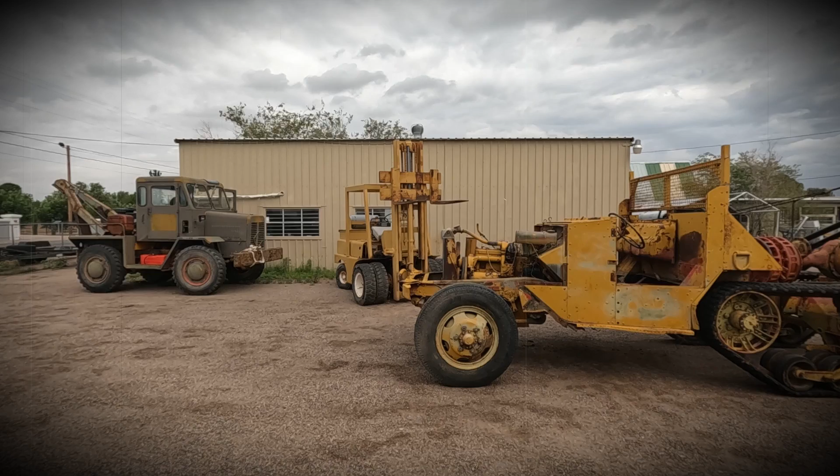Last time you saw me use this forklift, it lost forward and reverse right at the beginning of the job. I had to take the body off that half track just using this forklift and using something else to tow it around. Not the most convenient thing.

So in this video, I'm going to try to get this back driving again, going both forward and backwards, and still spending as little money as possible. Why don't you come along for the ride?

Now the transmission in this forklift is hydraulically operated. It's similar to an automatic transmission in a car. It's got a torque converter, and then it's got clutches to engage the different gears. In this case, it's a 2-speed transmission, high and low, and then forward and reverse. And those are independent, so you can have high and low, both backwards and forward.

So basically the principle is a pump pumps hydraulic fluid, that closes the clutches and holds them locked down, and that engages your wheels. And the torque converter sloshes fluid around like a big fan and squishes you forward. So how hard can it be?

Now what I have here is a diagram of all the fluid flowing through this whole transmission. We start off here with fluid in the bottom of the case of the transmission, and it goes this way. And it goes through a pump. It goes through a whole bunch of valves for pressure regulation. These are all automatic valves. This one here is one you can operate with a pedal to reduce the flow when you want to go slow, called an inching pedal or inching valve.

This one right here is the one that makes us go forward and backwards, and that's the one that gets the reduced pressure. Then we have the valve here that's low and high, so you can change whether you're in low or high gear with these clutches. Then we have a pressure relief valve, heat exchanger, filter, another relief valve, torque converter, and then back to one of the regulating valves. So that's the system we're working with.

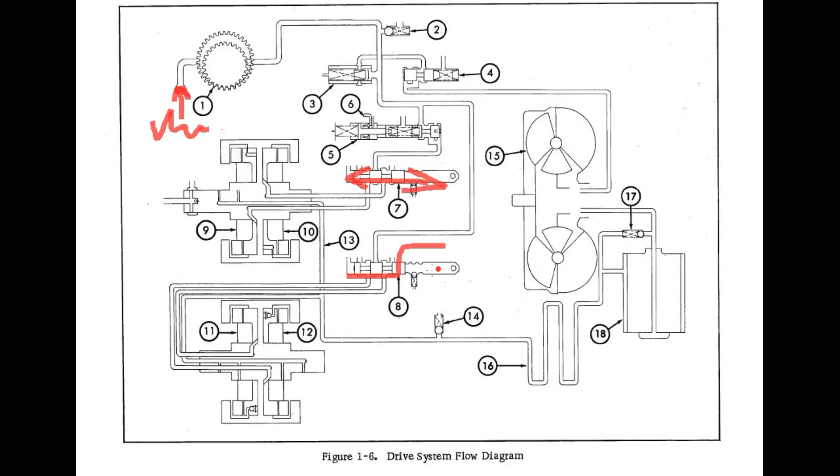There's an access panel here, disconnected the throttle pedal and the few bolts that hold it on. At least I think I got all the bolts. Yeah, there. Get this out of the way. And now we can get to the actual transmission.

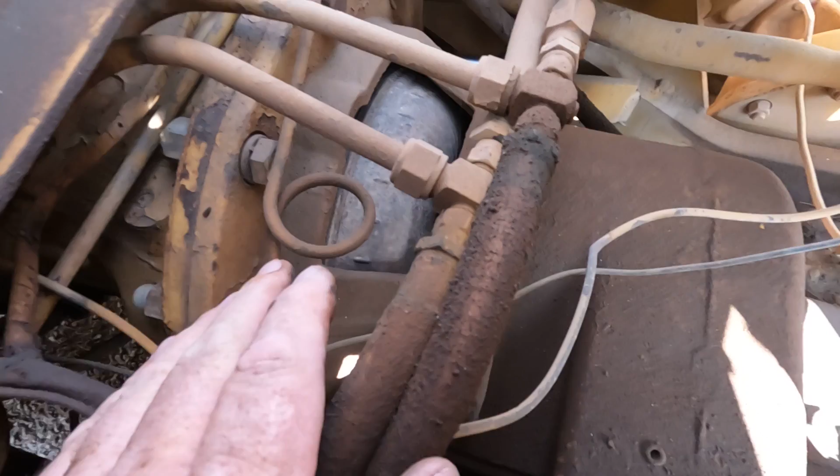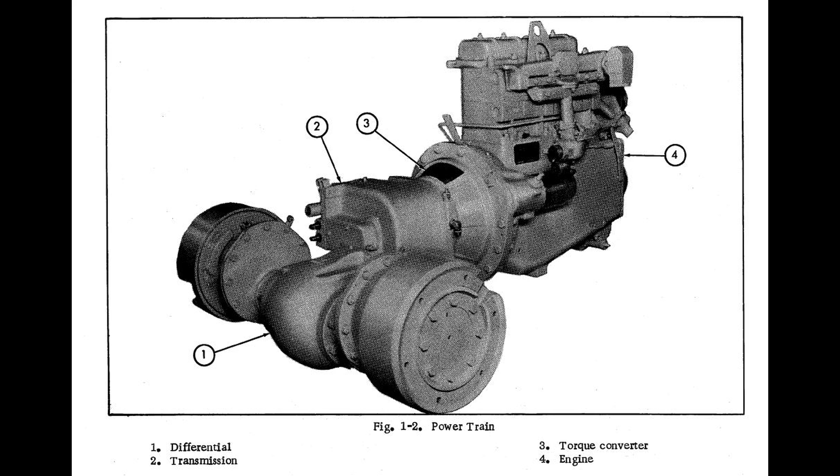Now, unlike a car, these things are all bolted together as a unit. So there's the engine. You can actually see the torque converter right there. Real easy access. Then we have the transmission right here, and that's the front axle. And the whole thing's bolted together as one unit, which means you can't take the transmission out without removing the front axle or the motor. And the book recommends taking the front axle out as the easy option. I hope to avoid that.

And it looks like this is the transmission filter. I talked to the previous owner. He had the same problem where it wouldn't move. He replaced the filter and then the fluid, and then it drove. Now the filter is right here, and that's at the end of the system. And also I noticed there's a relief valve here, so if that filter gets clogged, the fluid just bypasses it. But I'm not going to buy a filter because I don't think that's causing my problem.

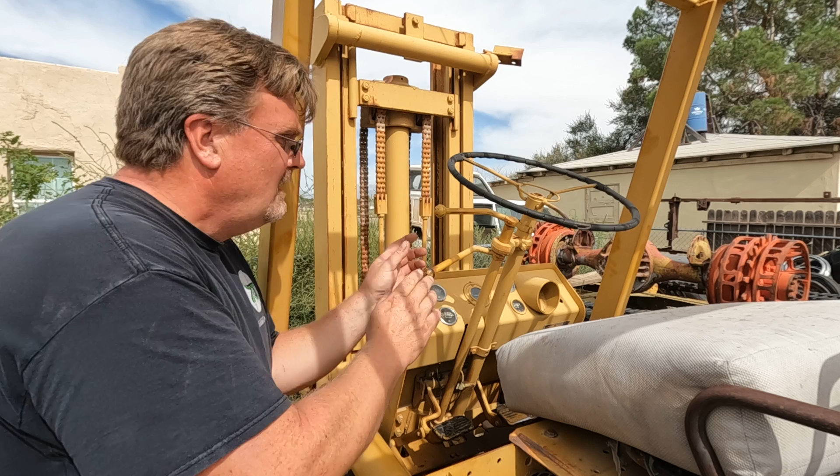Now these are the controls for the transmission. One is forward and reverse, and one is low and high. I don't know which is which. They're in a tube system that seized together years ago. So you can't move them independently at all. So you're shifting both of them at the same time. There is forward and reverse, which is this one that's hooked up. There's also high and low, which is not hooked up. Forward and reverse was the key thing. You can manually shift it between high and low right now.

Now these control that valve body back there. And that is what determines where the fluid goes in this transmission to actually make the clutches grab. Which means we need to make sure that is producing pressure to the clutches, and so we can see if it's the clutches that are slipping or they're just not getting pressurized.

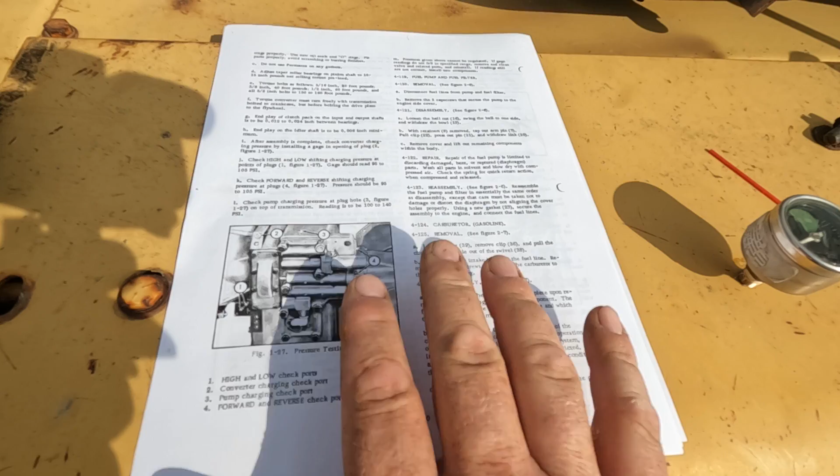Now I've got the manual here that shows all the ports and the pressures. Everything's supposed to be in the 100 psi range. And I've got a gauge here where it's got a green section from 80 to 120. So this will be easy to see. If that needle's somewhere in the green, we're probably okay.

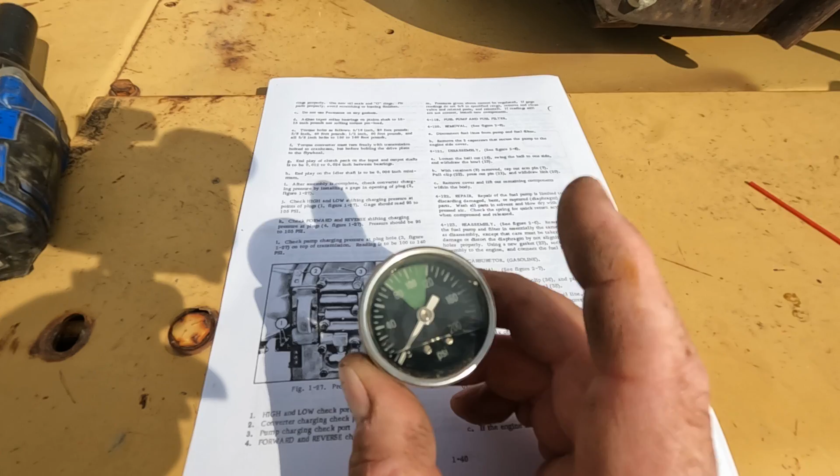Now, even though the problem I'm having with this forklift is it won't move, I went ahead and blocked off the tire, just in case by some miracle something decides to engage. But I'm not too hopeful on that. Maybe I should have left them off. Maybe that'll fix it, then it'll start driving away. Yeah, well, I don't feel like getting run over today.

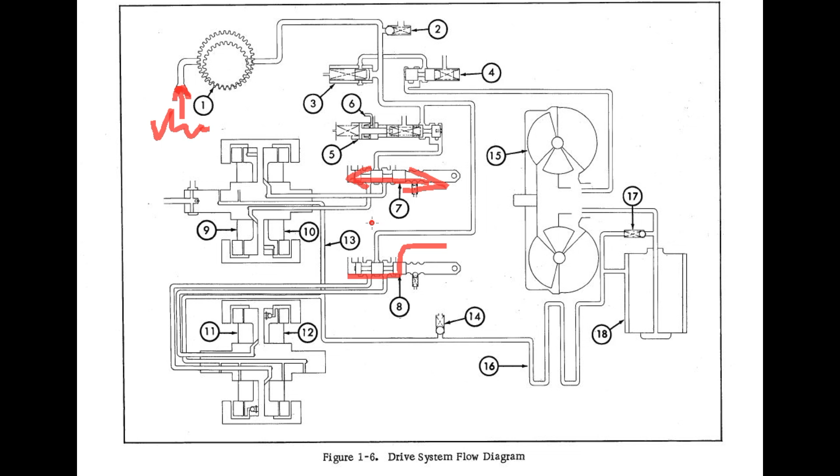Now, according to the diagram, the easiest ones to get to are these right here. The pressure going to the forward and reverse clutches. Let's see what we get here.

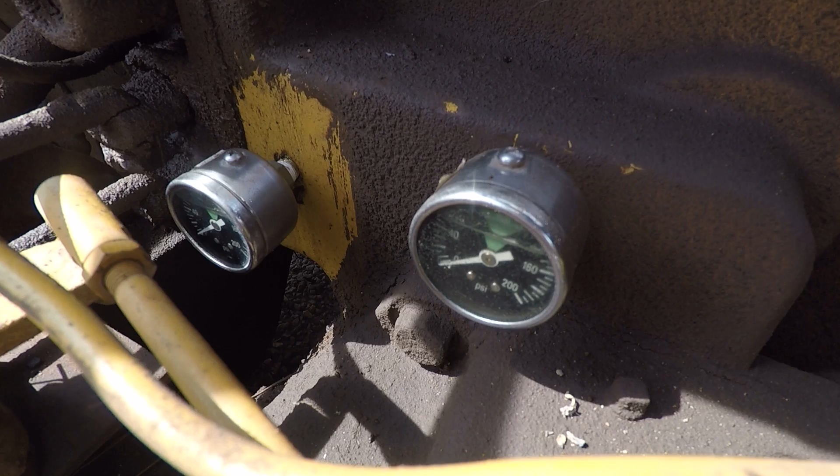We're gonna get no pressure at all on either gauge. Think we have a fluid pressure issue. Now, the fact that we have absolutely no pressure whatsoever is a good thing, because if it was full pressure and it didn't drive, that meant the clutches are shot, and those are expensive and hard to get to. If it had partial pressure but not enough to make it move, it probably means that it's worn out and needs to be rebuilt and just needs to make more pressure to drive.

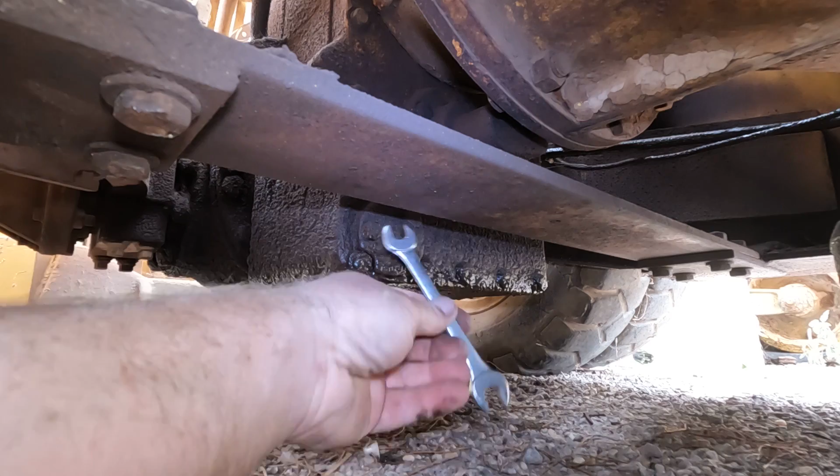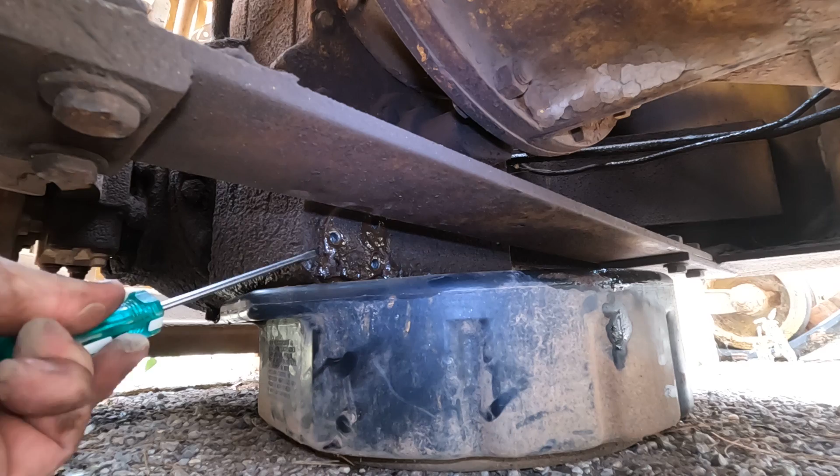Alright, got a pan, hopefully under most of it. I don't even know how this thing actually comes out, but there are bolts. Oh, there, we're moving. Alright, it's moving out. Maybe I can put this pan under a little better. And now it hits a cross member. So you can't actually take this out. Supposed to go up with it, maybe? There's no way they'd have something you'd have to remove the cross member in order to get the filter out, is there? Seriously? How are you supposed to remove that?

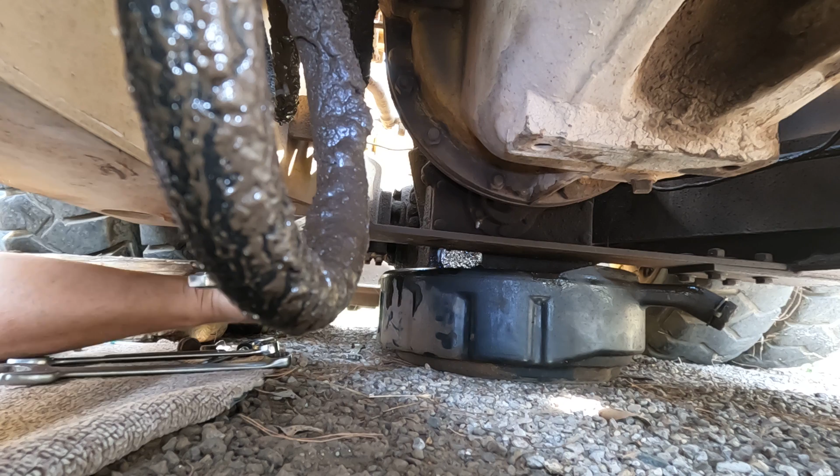If that's really design, that is terrible. And now, it looks like this cross member doesn't do anything useful whatsoever. So, I'm just going to remove one side, not the other. And hopefully I can put a jack under it and lift it up enough to flex it out of the way, and I can get my filter out. I think we're getting it. I'm going to end up dropping this thing in the pan, aren't I? Nope, maybe not. Well, this is what we got.

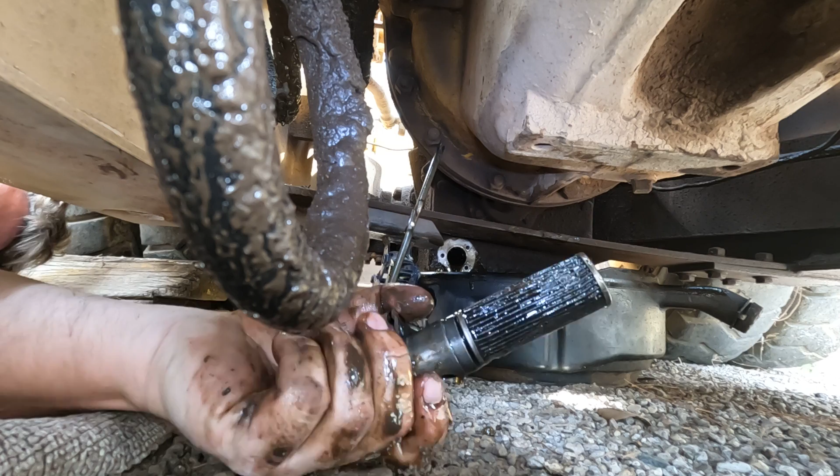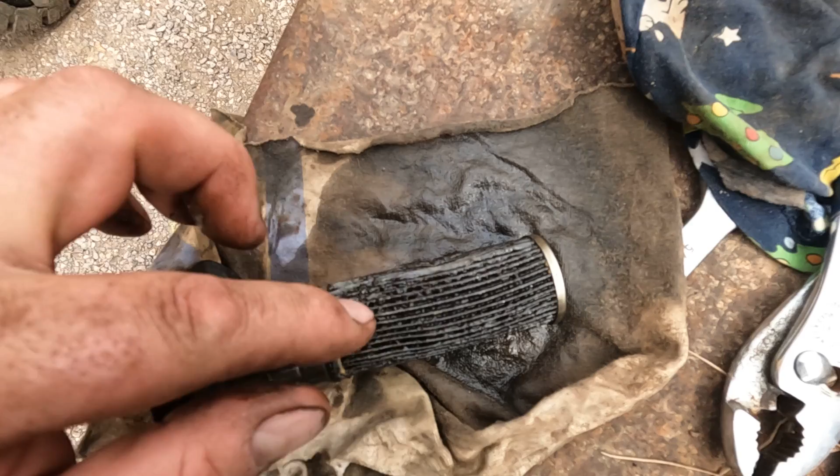So let's look at it in the daylight. And this is what the intake screen looks like. I'm suspecting it is possible that that was somewhat restricting the flow. There's a few chunks of stuff in here. I don't see any clutch material though, at least not a whole lot. Not big chunks like I'd expect if the clutches were destroyed, I'd expect to see more clutch material in it. I have a feeling we get fluid pressure, we might be back in business.

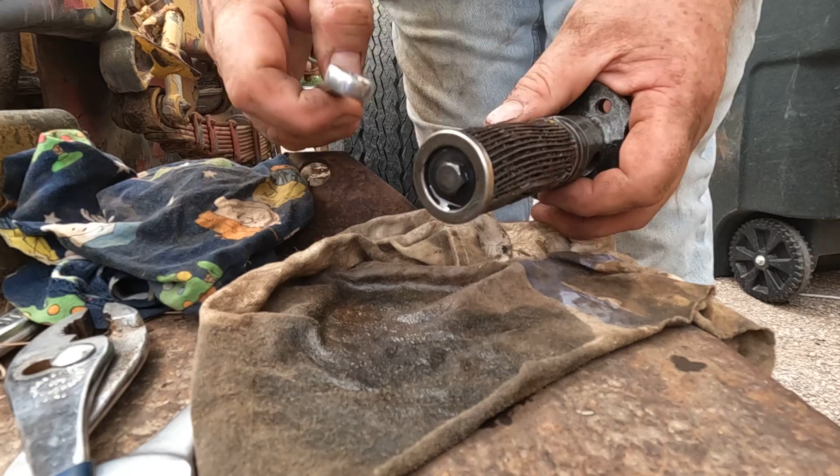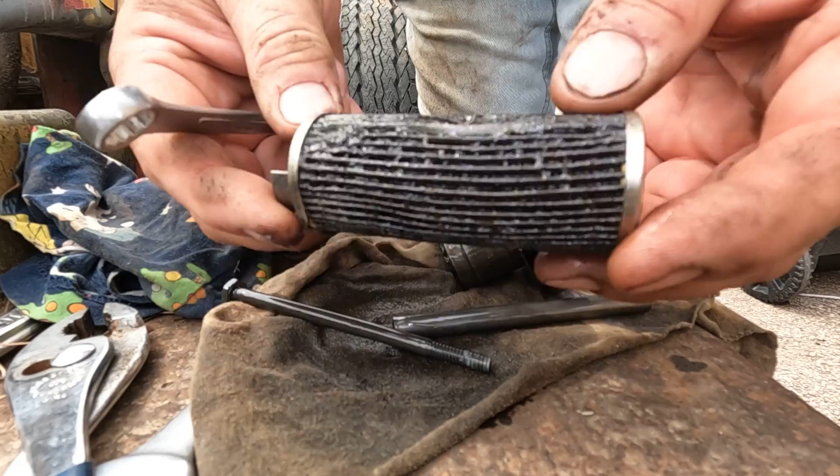There's a bolt at the end. Looks like I might be able to just unbolt this off the end here. There we go. Sleeve, long bolt. And there is our filter. Here's a handy container of solvent. Let's see what happens. We'll just let that soak for a little bit.

Remember when I said it's a good thing this transmission filter doesn't look like it has a bunch of clutch fiber pieces in it? I misspoke slightly. What I meant was it's completely clogged with clutch fiber pieces. Just lots of little ones. Now I'm actually encouraged by that because the problem I had was really a catastrophic failure where one day it worked and the next day it didn't. This looks like normal wear. So I'm thinking this hasn't been changed in, let's say, 50 years maybe.

When you have to remove a cross member to get to the intake screen, not many people are going to clean that. There was a little guard piece inside here that made the oil flow only one direction. That actually was just in by compression. All you do is squeeze a little bit and it popped right out. So now, I'm taking compressed air and I'm going inside the filter so that way you don't blow the stuff into it, you blow the stuff out of it.

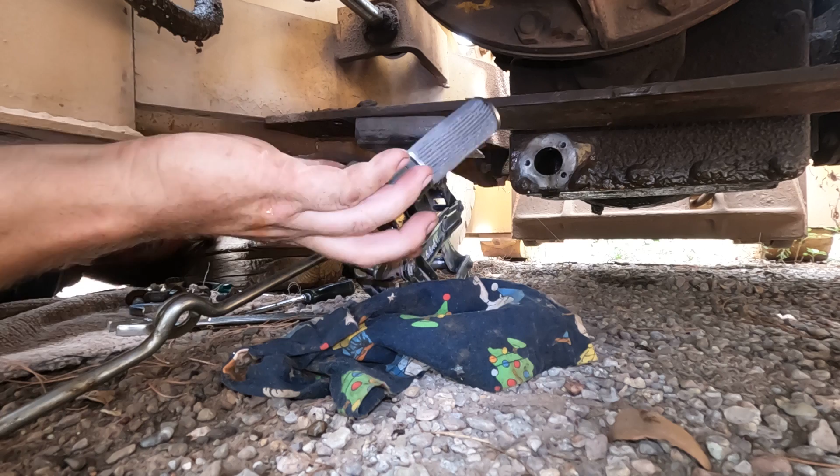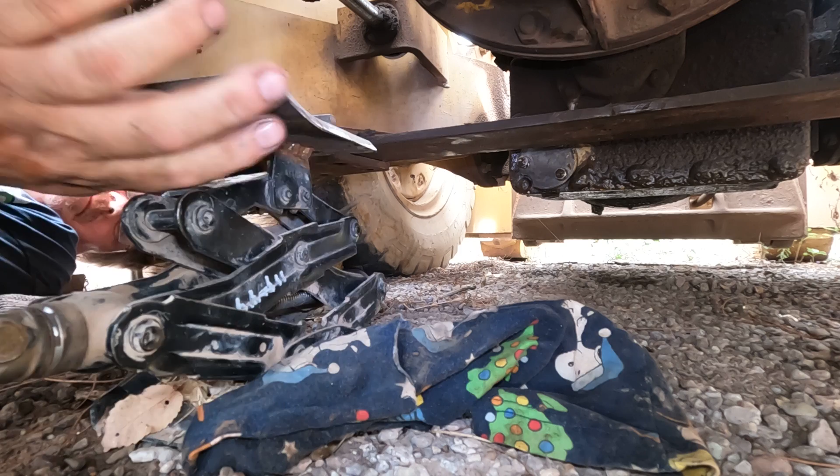I think we're ready to pop this thing back in. Now we lost most all the fluid, so I got my drain pan out of here. Let's sneak that thing back in. I've got the filter in place. I still need to tighten it down, but I'm going to see if I bent this cross member. I have enough room to let this down, and hopefully it just springs back into place. Cross member went pretty much back in place. Enough I can get the bolts on it. Tighten these down, then it's time to find some fluid to add.

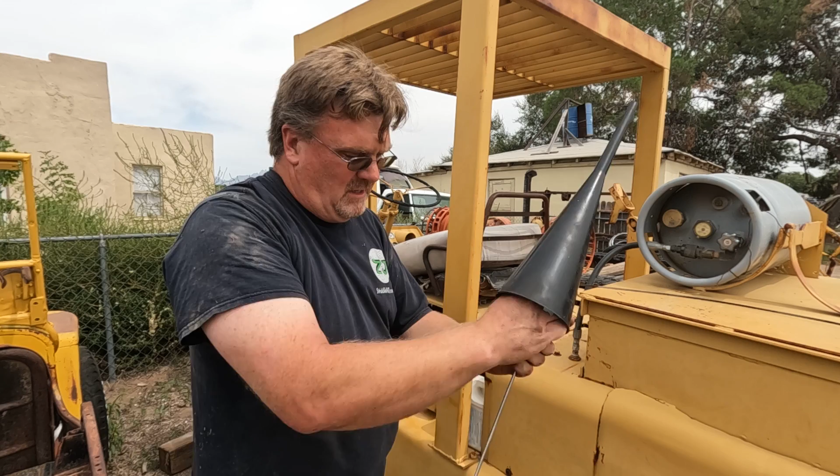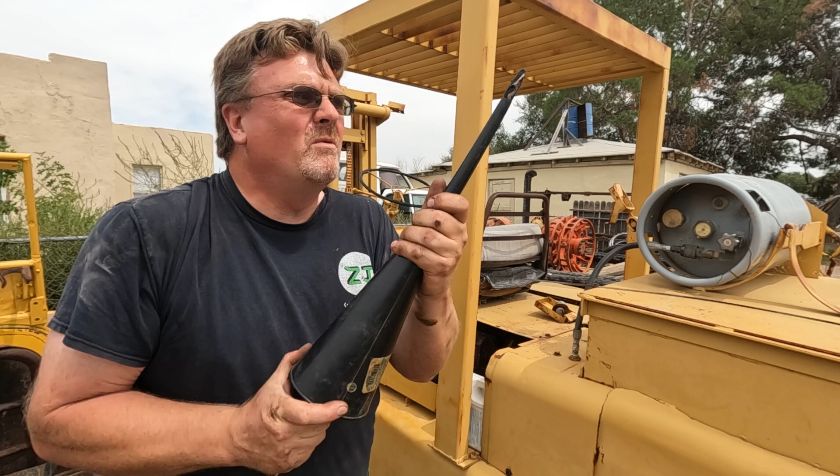I'm about to add fluid to this, but my funnel's full of dirt. Must have had some oil residue in it and the last dust storm came through. So now I'm cleaning out a funnel. Because, you know, I didn't actually want to get to driving this anytime soon. There we go. Usually shoving a rag all the way through does the trick. Now the rag's stuck. And I can't reach it. Alright, I need tools to get the rag out of the funnel. Okay, I'll be back.

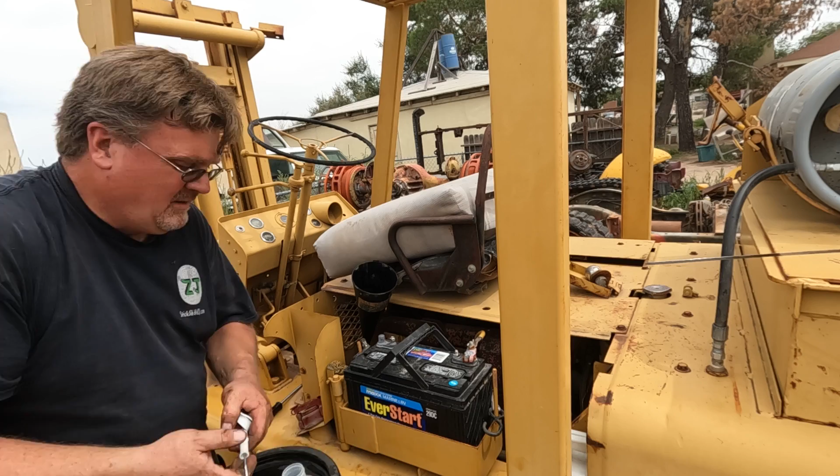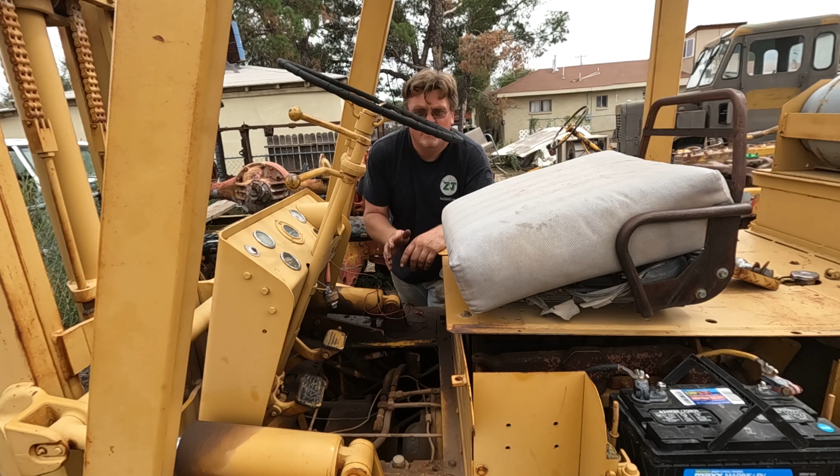Now I'm finally adding oil to the transmission. A lot came out, so I'm just going to pour a lot in. This bucket was only half full. It'll probably take the whole thing. Poured in that whole container of fluid. It actually shows too high, but it's not running yet, so who knows. Also, in the meantime, I managed to misplace my keys. And I figured it'd actually be faster just to hotwire this than to find my keys, so we're just going to do that. Alright, let's see what happens.

Spec calls for checking the fluid while it's running and in gear trying to drive away. I think they assume you have a working parking brake. The gauges are showing way below the rated pressure. So we very well have a bad transmission here, but the question is, can it move under its own power like it used to?

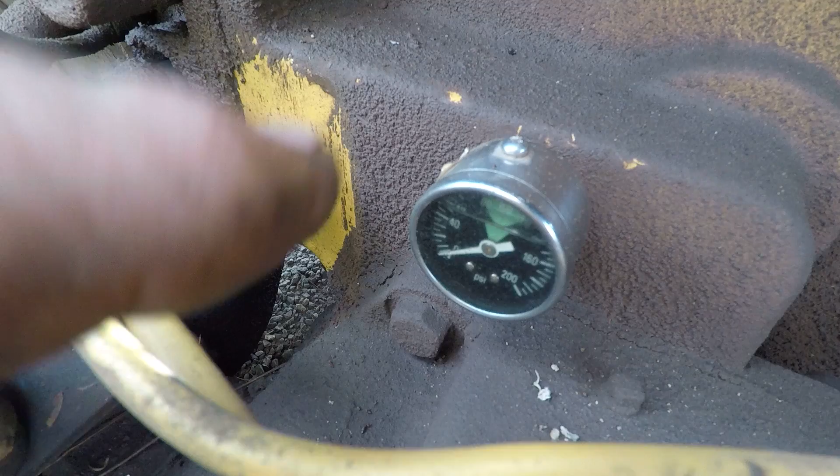Because I don't really care if it works well. It's not like I'm climbing any hills. I don't have a whole lot of hills to contend with here. So pretty much if it can move under its own power on level ground, I'm good to go. I expect it's actually a worn out transmission, but is it good enough? I'm going to leave the camera on these gauges while I drive, and let's see what it does.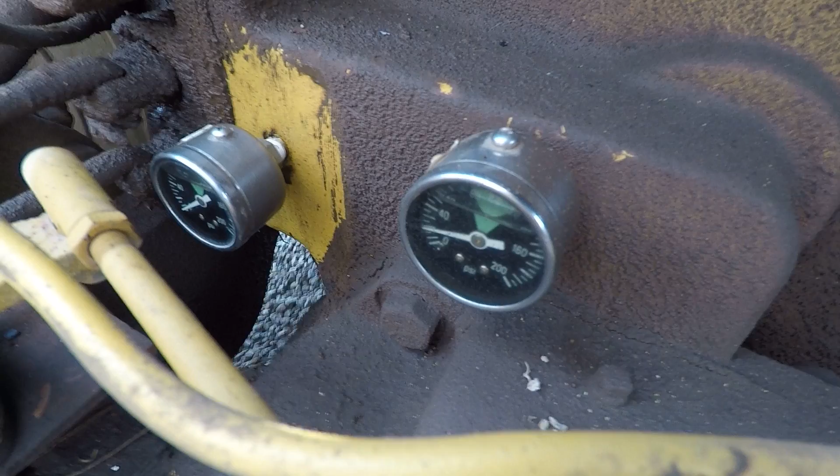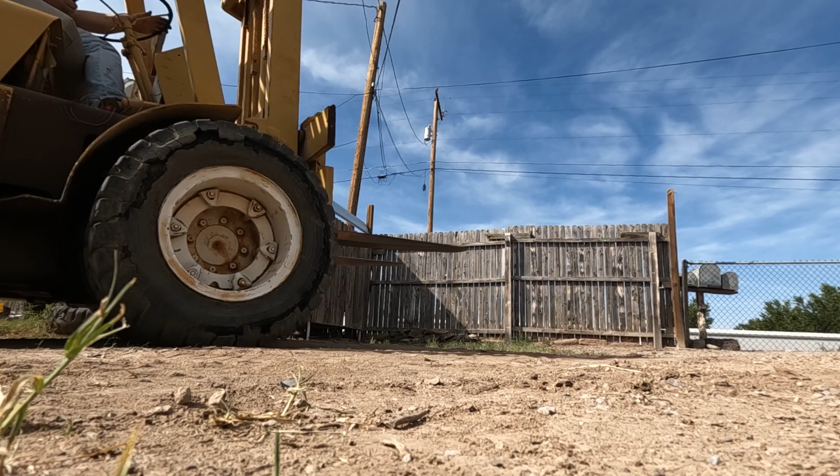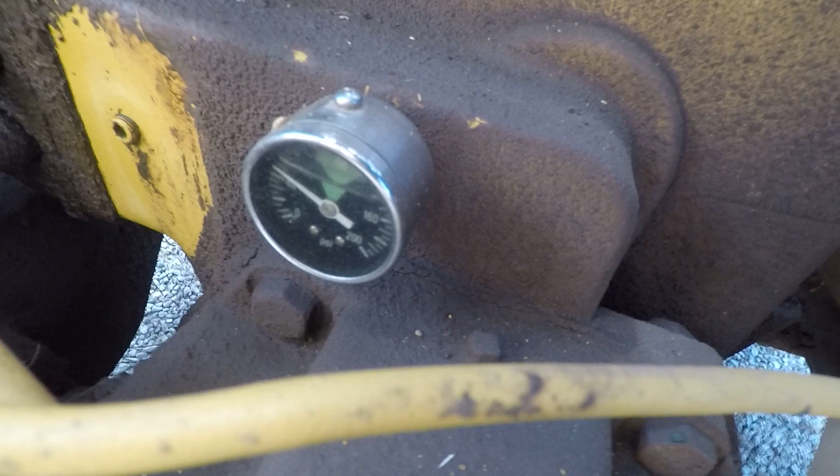This is the biggest hill I have in the yard. It goes up about 6 inches in 10 feet or so. Let's test the hill climbing ability. That's a win right there. I'm going to take a look at the video on those two pressure gauges. I haven't looked at it yet.

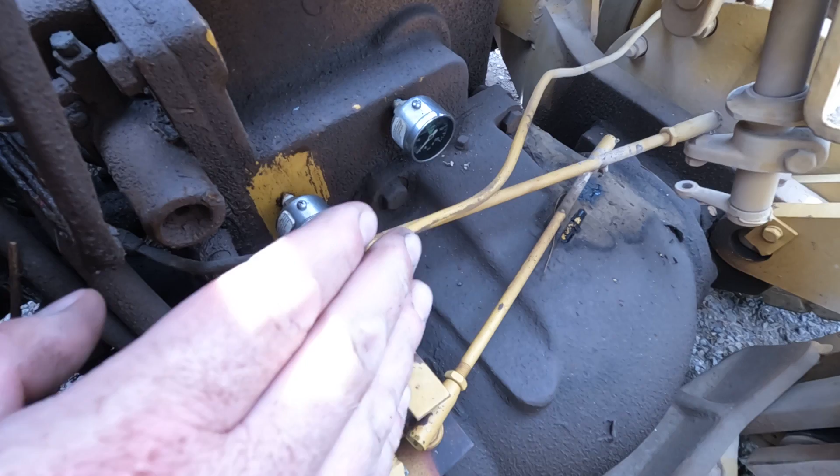Went back and watched the video of these gauges, and it was like 20 psi at idle, and then when I was driving it went up to about 40. That worries me a little bit. It makes me think I might have a bad pump. There's one more thing to check. Now we've determined that the pressure at these two lines is low. And basically that means these are slipping, but why?

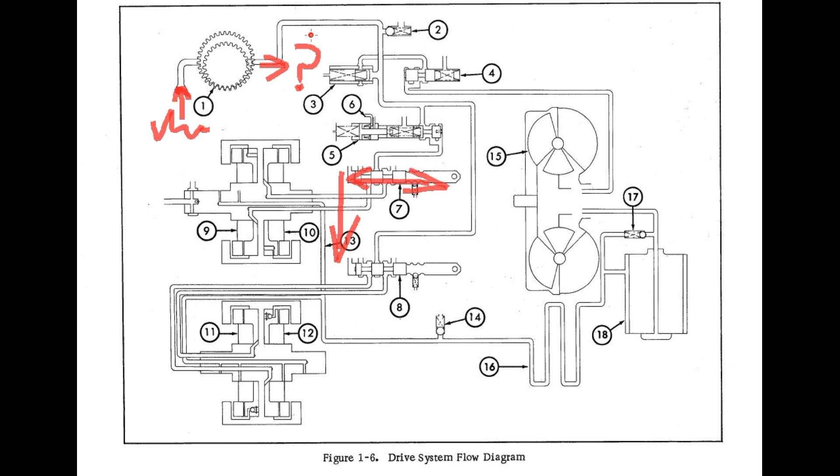So we have valves to go. There's that inching valve, we've got pressure regulators, and then the pump. So what we need to do is know what's coming out of this pump. Is that pressure right there enough? So I'm going to add a gauge over here. This port is straight pump pressure before the inching valve or any other valves. We should know what the pump's putting out right there.

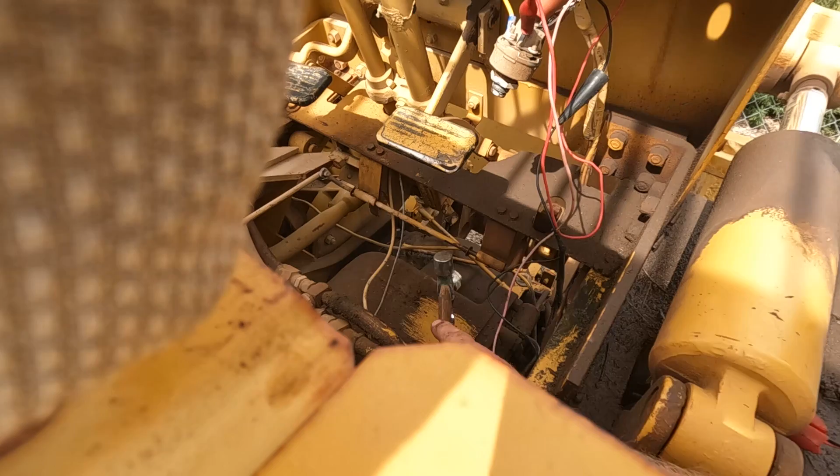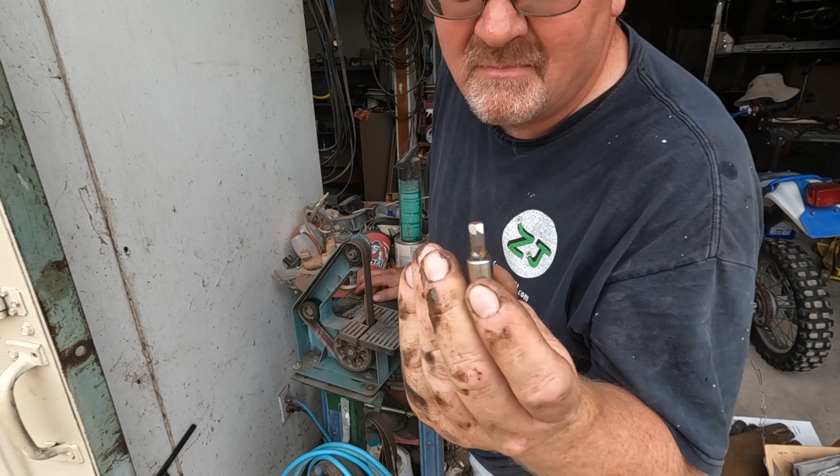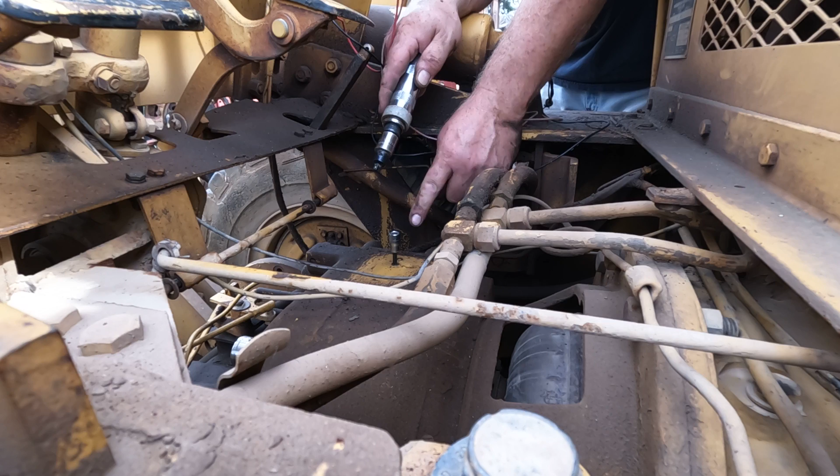And this hex is rounded off, so I can't take this plug out easy. Wonder if I can make a metric size fit. Nope, no luck. Now creating a new size in between metric and standard, the taper Allen head. Should fit there somewhere with a big enough hammer. I have the wrong size Allen socket. I have an adapter from 1/4 to 3/8 and another 3/8 to a 1/2 inch to an impact driver. So I think I'm using everything properly here.

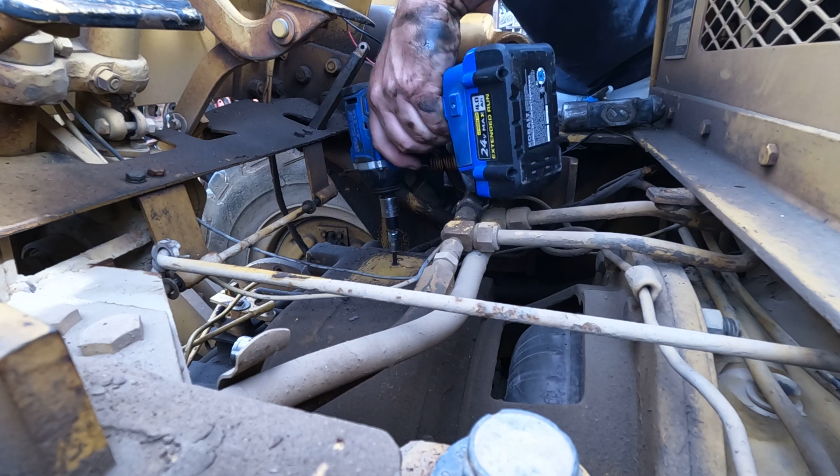Why is this not working? This clearly is the way these tools should be operated. Half-inch drive impact on a 1/4 inch socket. I don't see why there'd be any problem with that. Oh, hey, it worked. Now, we'll see what we got.

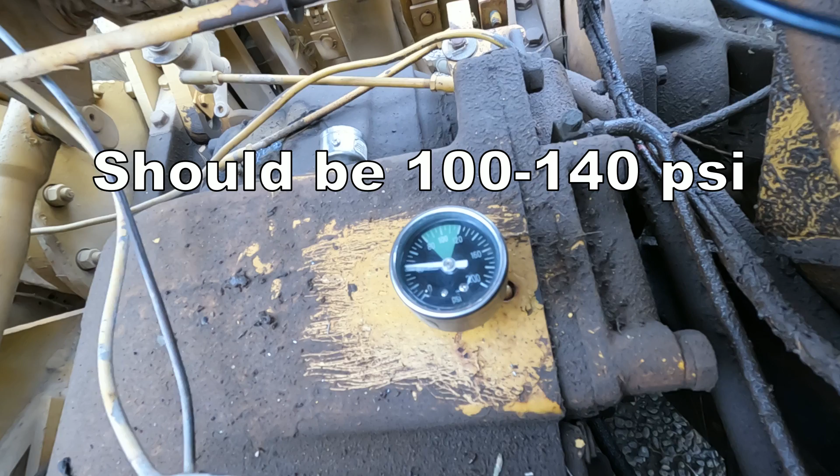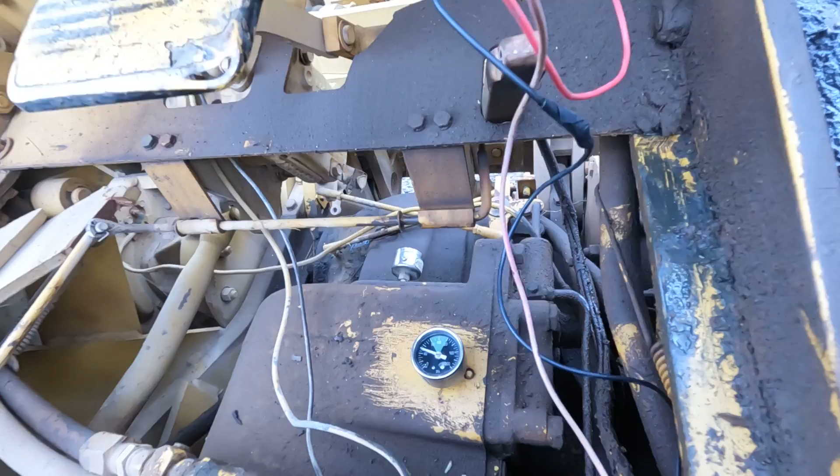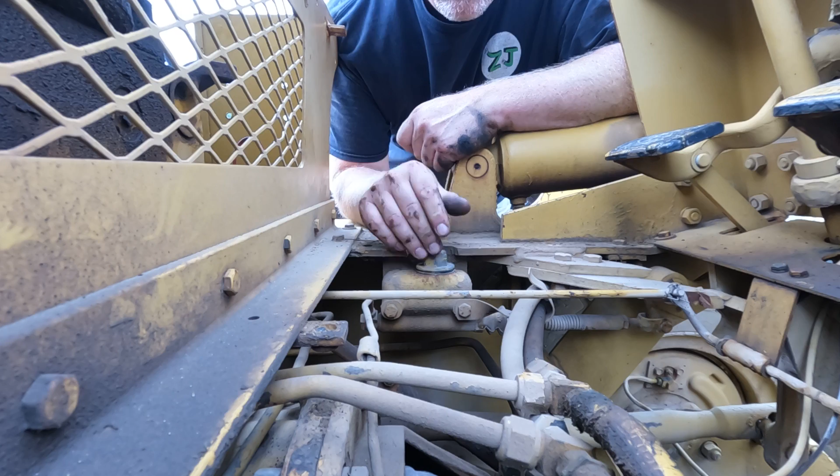Now I'm noticing 40 at idle, then up to like 100. Now on the transmission, we had 20 at idle, and went up to 40, which means we're losing pressure. We've got to look into that inching valve because that might be the issue. This is actually a hydraulic powered system, basically like a brake master cylinder. You've got a pedal here, and you press the pedal. This one doesn't seem to actually do anything, but when you press the pedal, it pressurizes this cylinder.

That master cylinder feeds this line right here, and that pushes a piston inside here to give you the reduced pressure. So obviously this doesn't work. This master cylinder is solid, but if there's pressure in that line holding that valve open, that might be causing a problem. So what we're going to do is relieve that pressure. And this up top here kind of looks like a bleeder or something I can take off and relieve the pressure.

Since this is off, all the pressure that was in there should be relieved. And nothing came out. Might do some driving. Maybe just driving it now that we have more pressure at the pump will free everything up.

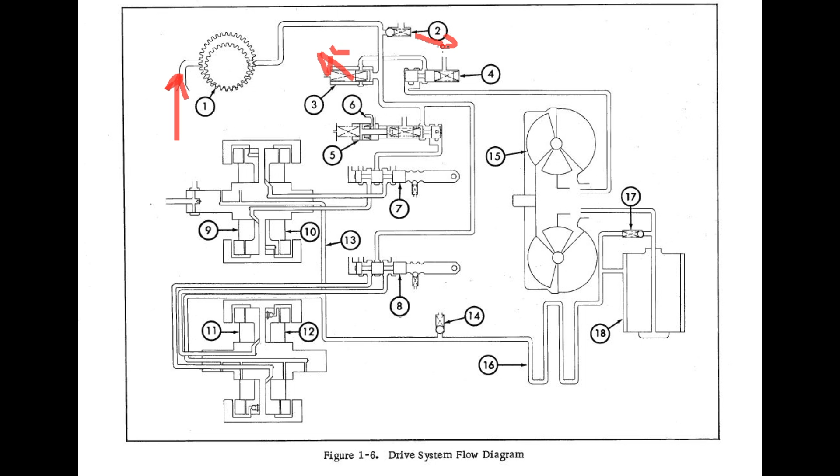Looks like we know what's going on. The biggest problem was the fluid going into the pump. Now that has been dirty for a long time, which means this pump has been starving for oil for years and probably is completely worn out. Now we also are losing fluid out of something here, maybe everything. Possibly this is stuck, maybe it's going out this relief, but basically any little bit of pressure we have is barely making it to this valve here.

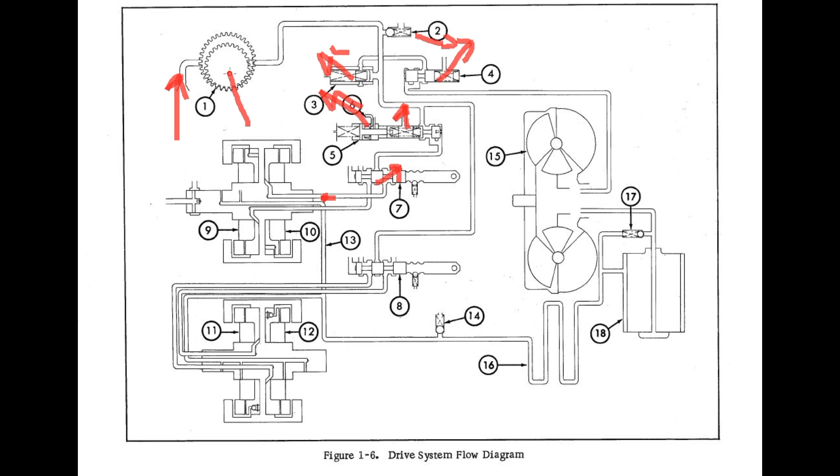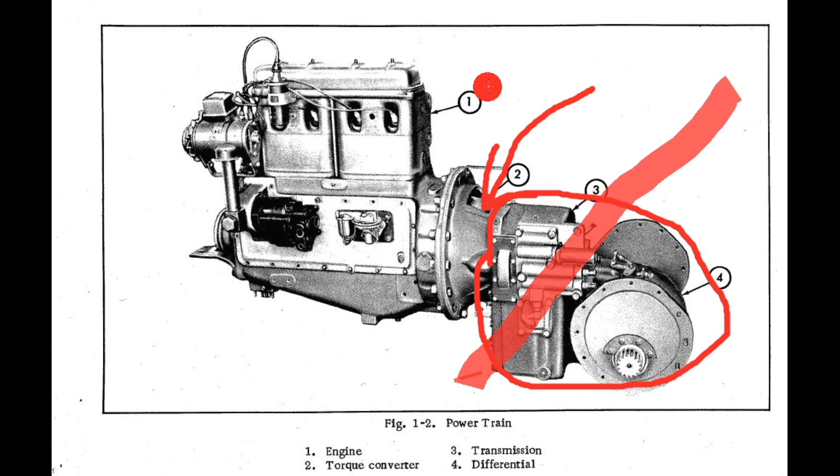It could even be this valve that's leaking, but luckily there's just a little bit of fluid getting to the clutches, enough to make it work for what I need to do. And the big thing is that right there is unavailable. Not only is that really expensive, it's right here, directly driven off the torque converter, which is right there. So all this stuff here has to be removed to get to that pump. And I'm just going to say no to that. Not for something that works well enough for everything I want to do.

Well, that's it. It drives. It's actually better than it ever was. It always had trouble even moving across level ground rolling. Now I could drop the forks and just slide them right along, and it goes pretty good. It gets anything I need to do around here done, and that's all I need. Now the only new stuff I used was the oil, and that was it. So that was a pretty cheap project, and that makes it a double win.